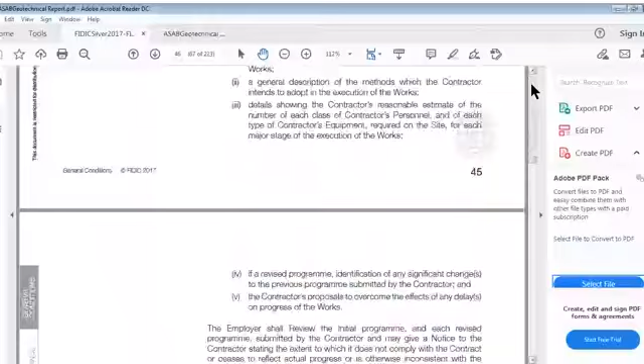Before that, I should move fast. I showed you something like commencement, delays and suspension, yes, I was there in that one. So now I'll talk, folks.

This is certain tests that we are doing, that's here. Now what this actually says, I discussed with you all this, this context of contents, there are just 20 contents, 20 sections, and actually 21.

Once last one's arbitration, so section number 1, that's clause number 1. Introduction, then 2 is project description, 3 is site description, 4 is prevailing conditions, and 5 is general geology of area. All this is shown, and this is about this reporting.

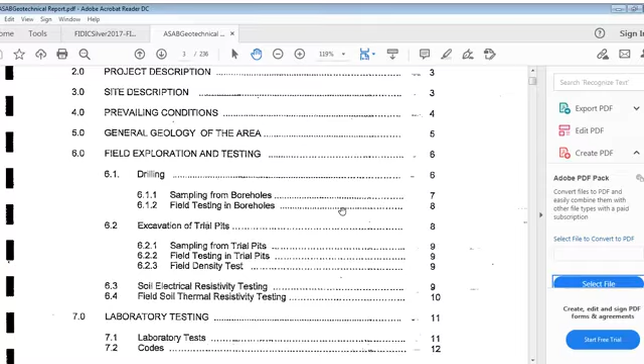General geology of area, field exploring and testing, and all that. Then laboratory testing, surface and subsurface conditions, and then this is about soil report and general discussions for choice of suitable foundations, and conclusions and recommendations.

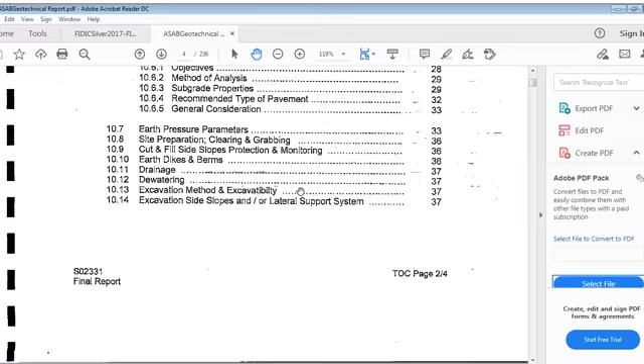And then another one has 21 clauses, that is for FIDIC. This is technical reports from a laboratory. So both are, one is technical and one is contract, so don't confuse. And the other one, I'll start with this.

All these are there, all these are shown to you, these reports, and there are certain attachments also which are very interesting, with location. We are discussing the location of boreholes and trial pits, then logs of boring and trial pits we discussed, and field test results, etc. We did not discuss completely.

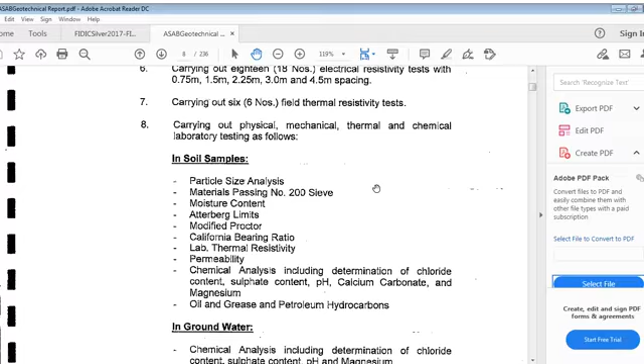So I'm not considering which company, I'm considering technical requirements. That's soil samples, test of particle size analysis, materials passing through No. 200 sieve, moisture content, Atterberg limits, modified Proctor, California bearing ratio, lab thermal resistivity, permeability, chemical analysis, including determination of chloride content, sulfate content, pH, calcium carbonate, and magnesium, oil and grease and petroleum hydrocarbons.

Then in groundwater, chemical analysis, including determination of chloride contents, sulfate contents, pH. I think there's nothing as such.

How is happening here? Camera come here. What's the camera? Why it's not taking? I don't know, what's that? How is happening, there's no camera. None of the cameras on documents, I think. This document, how can you depend on camera on this?

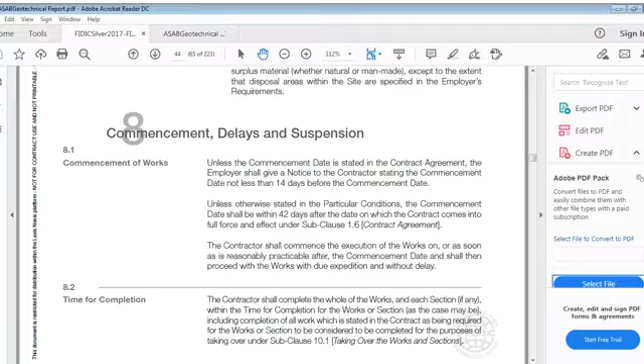See, is it? Yes, it's groundwater now, saying groundwater. So groundwater is not checked down. Groundwater is, it's not groundwater, it's, yeah, it's groundwater.

Chemical analysis including determination of chloride contents, sulfate contents, pH and magnesium, oil and grease and petroleum hydrocarbons, performing engineering analysis of field and laboratory findings, developing conclusions and recommendations for design and reporting.

So it's sharing, well, why are people sending this here? I'm fed up with these people. I should talk to them. I should talk on this. It's really a very, very serious issue, but people are not serious, they're not serious, they don't allow to work. Unfortunately, I don't like it.

So chemical analysis including determination of chloride content, sulfate content, pH, magnesium, oil and grease and petroleum hydrocarbons, performing engineering analysis and field and laboratory findings, developing conclusions and recommendations for design and construction and reporting.

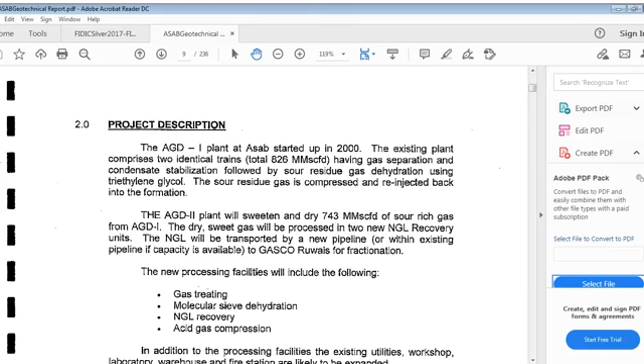Then you can say project description is there, and if you see that one, you will find the project description. So it's coming here, and this is what I can say. Project description means site description is there about this.

We go further. Prevailing weather conditions. These conditions are because it's happening in the Gulf, just briefly I'll tell you. The site is situated in Abu Dhabi, where hot and dry climate prevails. Hot and dry climate is one where evaporation exceeds the precipitation, such as rain and dewfall.

This climate regime produces characteristic hot desert terrains. Average annual rainfall may only be a few centimeters, even only a few millimeters in some parts, which usually occurs seasonally and sometimes only from a single cloud burst. Summer shade temperatures are frequently in excess of 40 degrees Celsius, and humidity may be around 100%.

Near the coast, a contrast between maximum night and day temperature and between night and day humidities is often great. Strong persistent winds are normal in many areas.

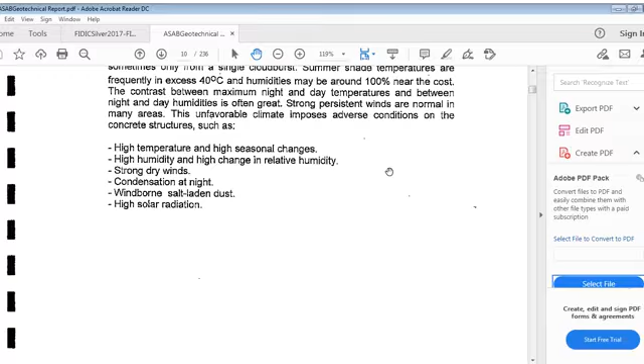This unfavorable climate imposes adverse conditions on concrete structures, such as high temperature and high seasonal changes, high humidity and high changes in relative humidity, strong dry winds, condensation at night, windborne salt-laden dust, and high solar radiation.

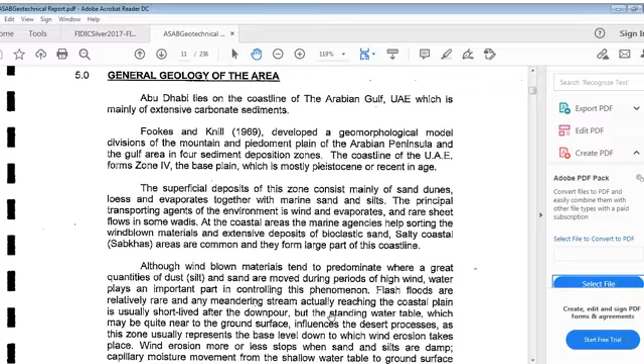Then general geology of the area, that's another point. Abu Dhabi is on the coastline of the Arabian Gulf, and they developed a geomorphological model division of the mountain long back, so we do not go further.

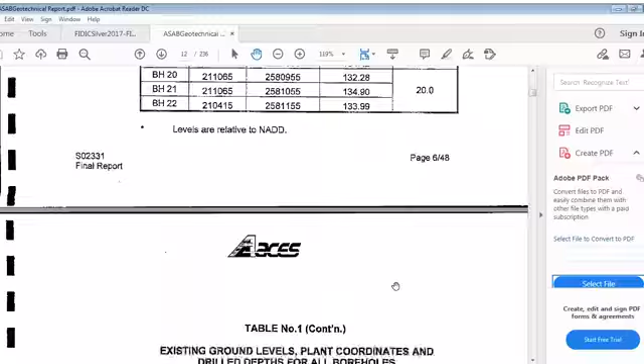And we talked of the existing ground levels. We discussed all that field data, all these tables. I discussed about borehole logs, and also there's laboratory tests that we use in order to determine physical, mechanical, thermal and chemical properties of ground material.

Laboratory tests were performed on selected samples from boreholes, trial pits and from existing surfaces. Laboratory test results are presented now. Which are those? Moisture content according to whatever it is, grain size analysis minus number 200.

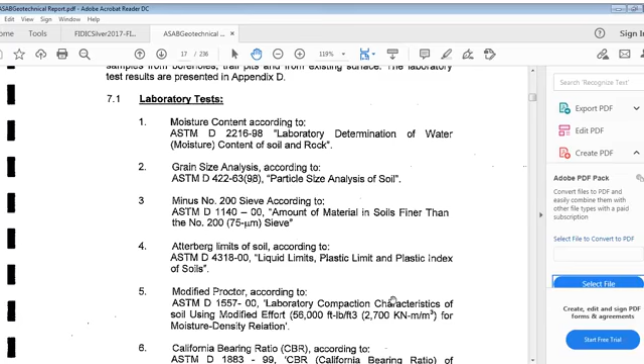Sieve analysis too, and then atterberg limits of soil, and then modified proctor according to this one, and the California bearing ratio, CBR, and lab permeability according to that. Soil thermal resistivity, water soluble sulfate content of soil and sulfate content of soil, and water soluble chloride content of soil.

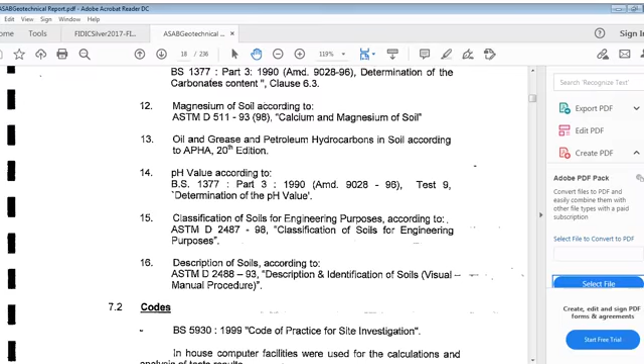And calcium carbonate content of soil, and magnesium of soil, according to the oil and grease and petroleum hydrocarbons, pH value according to the classification of soils.

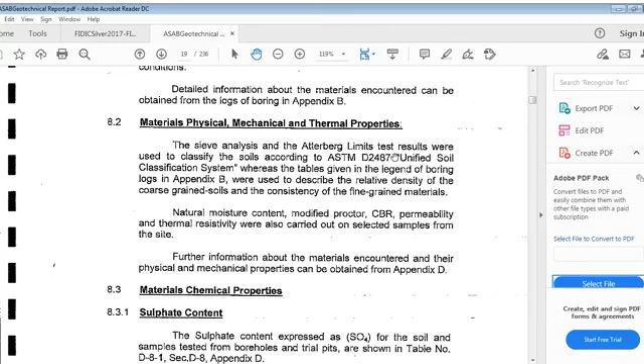For engineering purposes, description of soils according to this and the codes, and then we have to look at material physical, mechanical, and thermal properties. You can say sieve analysis and atterberg limits. Those results were used to classify soils in the unified soil classification system. So material chemical properties: sulfate content, chloride content, and others, and pH.

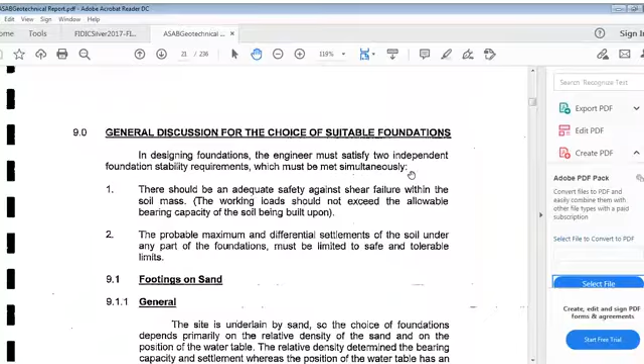Like that, we move to general discussion for choice of suitable foundations. We did that. Then we moved further down to conclusions and recommendations, foundation type, we did that. Then tank foundation hydrostatic testing, we did that also. And then allowable bearing capacity for shallow foundations, that we did now.

Then we had also gone to this allowable bearing pressure at different depths, and this we had gone through clearly. I think we had gone through all this. I think we have gone through, I'm not sure, but we will discuss that. All this, we just have a review look so that you can read that, it's better.

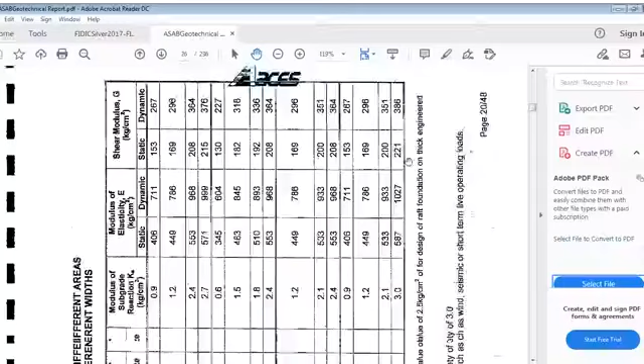That's a review of this. No, it's wrong.

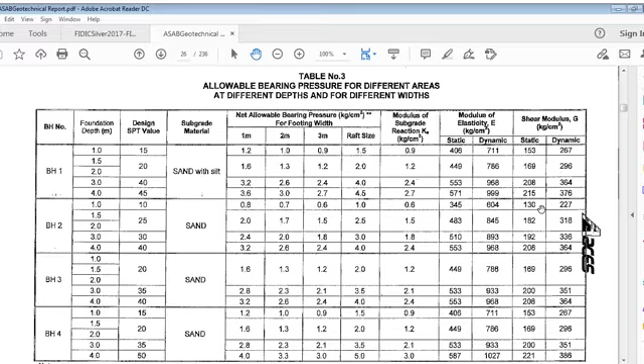So this is allowable bearing pressure for different areas at different depths and different widths. We had discussed about this, all boreholes, and we discussed about foundation depth in various during bore logging, and design SPT values are different.

Then subgrade modulus, which is that, and net allowable bearing capacity at 1 meter, 2 meter, 3 meter, 4 meters for different areas, meaning net allowable pressure for footing. We studied modulus of subgrade reaction, and then also modulus of elasticity and shear modulus.

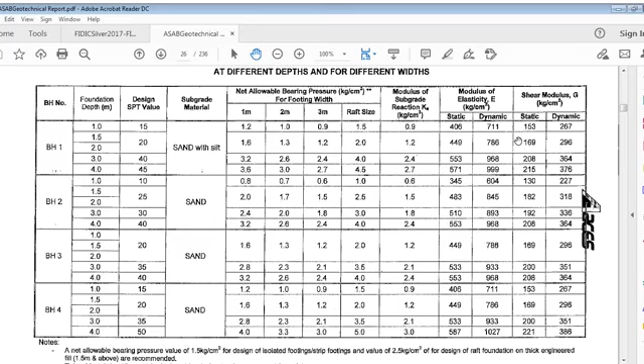We had seen that the static and dynamic values are different, about 75% difference is there. I think 75.7 percent. And this shear modulus we saw difference for all this, and we just understood that well in all these cases.

And the same notes are there, no different noting is here. And the noting says a net allowable bearing pressure value of 1.5 kilogram per centimeter square for design of isolated footings, strip footings, and a value of 2.5 kilogram per centimeter square for design of raft foundation on thick engineered fill are recommended. So thick engineered fill is recommended, that's the important one.

And then let us say, I'm sorry, let me pull off this battery also for half an hour, so that the battery can rest for some time. What's happening?

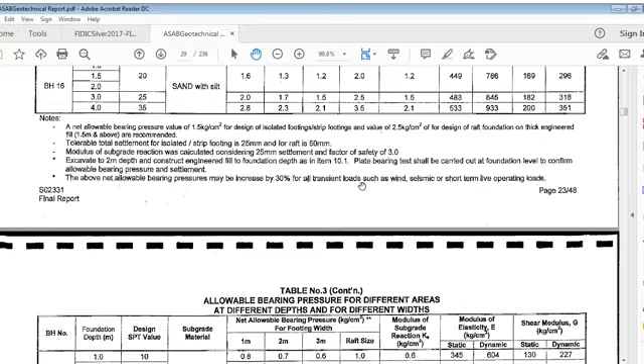Tolerable settlement for isolated strip footing is 25 mm and for raft is 50 mm. Modulus of subgrade reaction was calculated considering 25 mm settlement and a factor of safety of 3.

Excavate to 2 meter depth and construct engineered fill to foundation depth as item number 10.1. Plate bearing test shall be carried out at foundation level to confirm allowable bearing pressure and settlement, and these net allowable bearing pressures may be increased by 30% for all

transient loads such as wind, seismic, or short-lived, short-term operating loads. This is transient load, not persistent load.

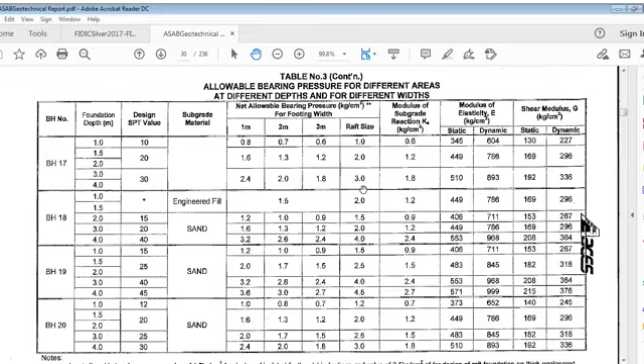We discussed all these separate boreholes one by one, and evaluated them according to our own understanding. I think these are all 28 boreholes we discussed, and now we move on.

I'll move again, rotate this. I rotate this as well. Again, I forget how to rotate this. Clockwise it is, I use clockwise here again.

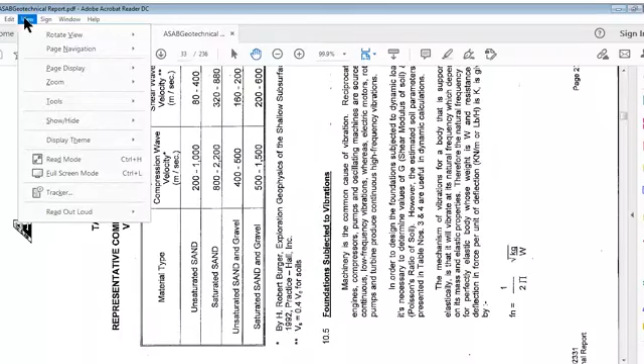Yes, this is the representative compression wave and shear wave velocities. This is very important from our point of view, because we have to understand this shear wave velocity and compression wave. What does it say?

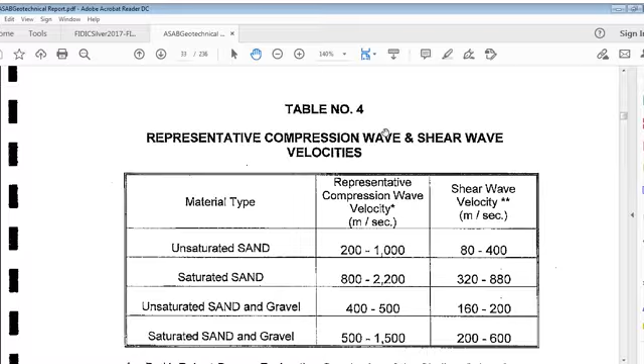It says material type, and we discussed this also: unsaturated sand, saturated sand, unsaturated sand and gravel, and saturated sand and gravel. The representative compression wave velocity is in meters per second, and shear wave velocity is also in meters per second.

Let's take some water there.

In unsaturated sand, representative compression wave velocity is 200 to 1000 meters per second. Shear wave is 80 to 400, so 40% of that. In saturated sand, representative compression wave is 4 times the original, that's 800, and 2.2 times the maximum one.

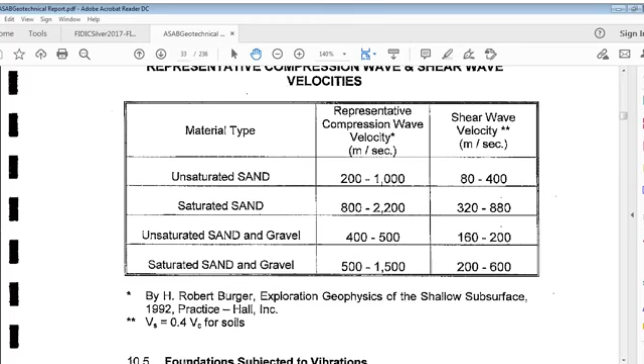Same applies to the lower one. For saturated sand it's 500, less than that. Here unsaturated sand is more, but saturated sand and gravel is 500, less than the previous case.

Now this is based on Vs. It says Vs equals 0.4 Vc, where Vs is shear velocity, which is 0.4 times Vc for soils.

So now, foundations subject to vibrations. It's very important now. Vibrations, foundations subject to vibrations. That's really interesting. Every foundation is subject to vibration.

Reciprocating engines, compressors, pumps, and oscillating machines are sources of continuous low frequency vibrations, whereas electric motors, rotary pumps, and turbines produce continuous high frequency vibrations. So in reciprocating machines, high frequency is less, but in circular or centrifugal machines, it is high.

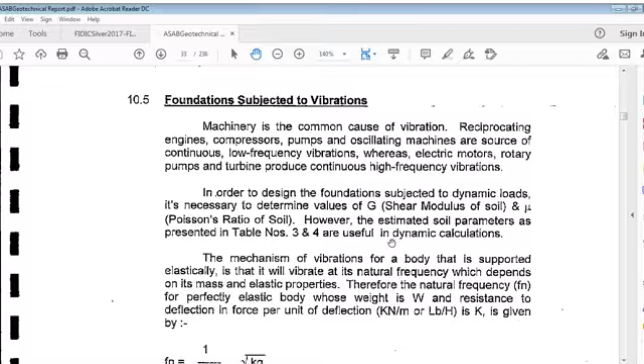In order to design foundations subject to dynamic loads, it's necessary to determine the value of G, the shear modulus of soil, and mu, the Poisson's ratio of soil. These estimated soil parameters are useful in dynamic calculations.

The mechanism of vibration for a body supported elastically is that it will vibrate at its natural frequency, which depends on its mass and elastic properties. Therefore, the natural frequency for a perfectly elastic body whose weight is W and resistance to deflection in force per unit of deflection is K.

Resistance to deflection in force per unit of deflection is K. Mechanism of vibration of a body that is supported elastically: it vibrates at natural frequency, which depends on its mass and elastic properties. Therefore, natural frequency Fn for a perfectly elastic body whose weight is W, and resistance to deflection in force per unit of deflection is K, is given by Fn equal to 1 over 2 pi under root of Kg over W.

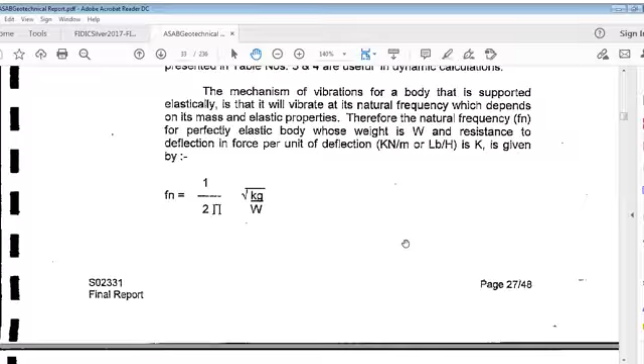General considerations in designing dynamic bases. This is very, very important. For analysis of foundation blocks subject to vibrations, the following should be considered in design. Foundation blocks means massive blocks, not concrete blocks. Be careful.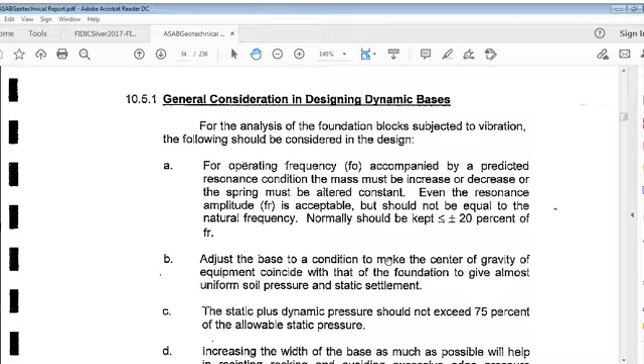Adjust the base to make the center of gravity of the equipment coincide with that of the foundation, to give almost uniform soil pressure and static settlement. Static plus dynamic pressure should not exceed 75% of allowable static pressure. Increasing the width of the base as much as possible shall help in resisting rocking and avoiding excessive edge pressure problems.

Try to provide 300 mm clearance all around the machinery frame to help in maintenance and other requirements. It is seldom necessary to use high strength concrete for vibrating bases, since mass is usually more critical than strength.

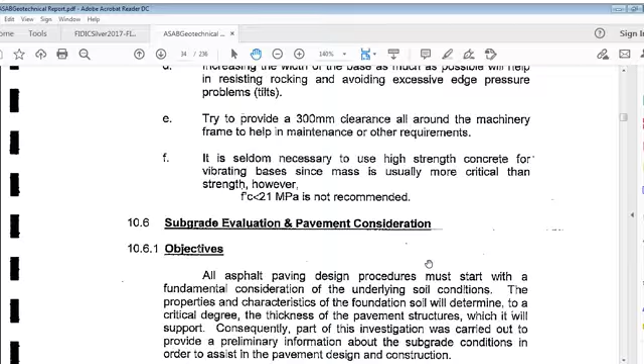F-C less than 21 MPa is not recommended, so let us say more than 21. Why 21 only? Subgrade evaluation and pavement consideration - subgrade, now this is for roads we are talking about.

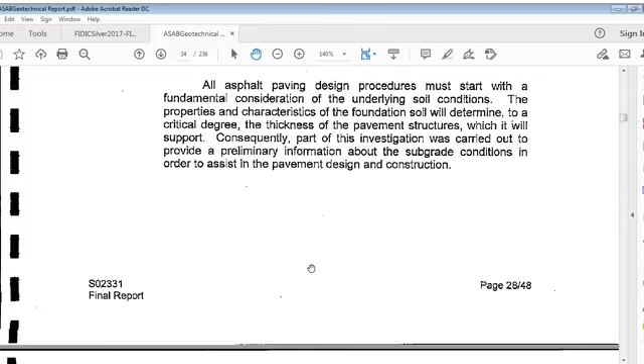Subgrade evaluation objective: all asphalt paving design procedures must start with fundamental consideration of the underlying soil conditions. Properties and characteristics of the foundation soil will determine to a critical degree the thickness of pavement structures which it will support. Consequently, part of this investigation was carried out to provide preliminary information about subgrade condition in order to assist in pavement design and construction.

Method of analysis: origin, composition and properties of subgrade soils in the area of trial pits were determined. Soil classification and identification is based on ASTM 2487, classification of soil for engineering purposes, unified soil classification system, and AASHTO M145-91 classification for soil.

Classification of soil for engineering purposes, unified soil classification system, and AASHTO M145-91 classification of soils and soil-aggregate mixtures for highway construction purposes - so there are two purposes. It should be recognized that current methods for evaluating soils and aggregates are generally considered to be of an empirical nature. Engineering judgment therefore must be used in applying the results of these tests.

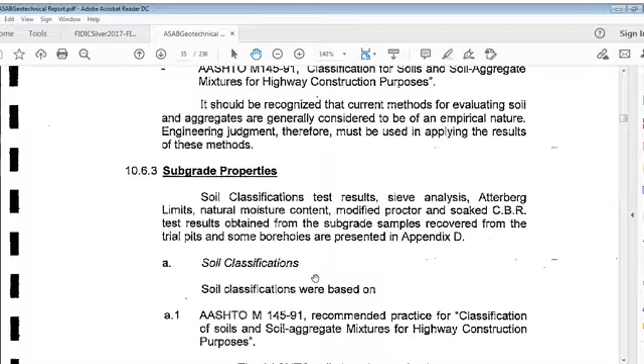Subgrade properties: soil classification test results, sieve analysis, atterberg limits, natural moisture content, modified Proctor and soaked CBR test results obtained from subgrade samples recovered from trial pits and some boreholes.

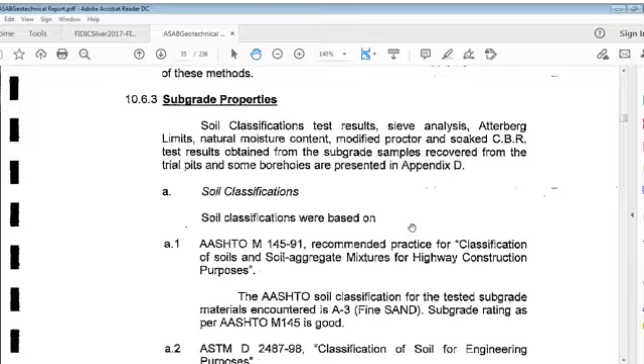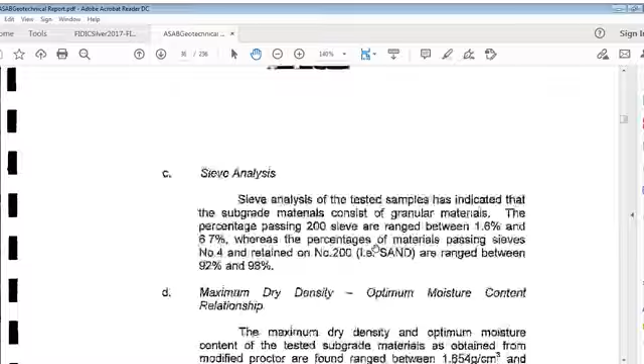Sieve analysis of tested samples indicated that subgrade material consists of granular materials. Percentage passing sieve number 200 ranged between 1.6 and 6.7%, whereas percentage of materials passing sieve number 4 and retained on number 200 are in range.

Sieve analysis of tested samples has indicated that subgrade material consists of granular materials. Percentage passing sieve 200 ranged from 1.6 to 6.7%, whereas percentage of materials passing sieve number 4 and retained on number 200 ranged between 92 and 98%.

Maximum dry density versus optimum moisture content relationship: maximum dry density and optimum moisture content of tested subgrade material, as obtained from the modified Proctor test, are found.

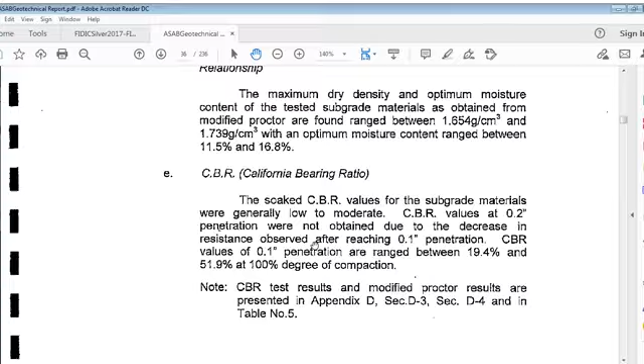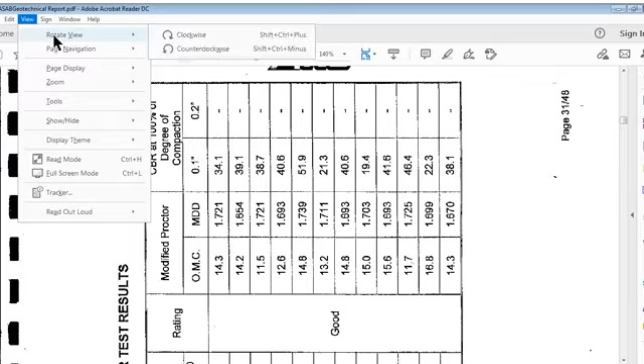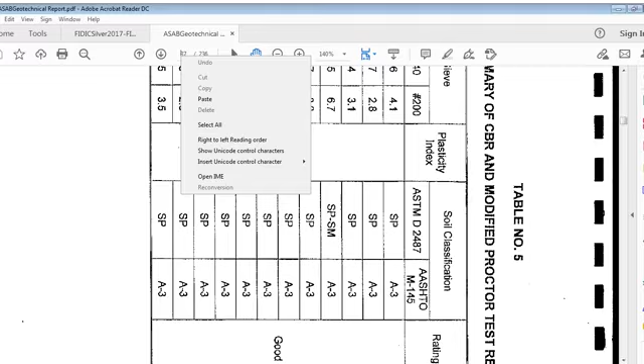Let us compare this directly. This is the table. What is this? Not this one, that was that one. Which file is open? I don't know which file is open actually. Why is this open here? Why is this user system like this? That is very heavy stuff.

The summary of CBR and modified Proctor test results. This is also part of the slope study, and that is also very important. You can see that...

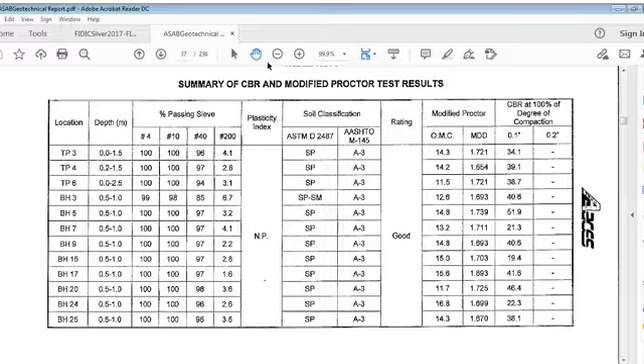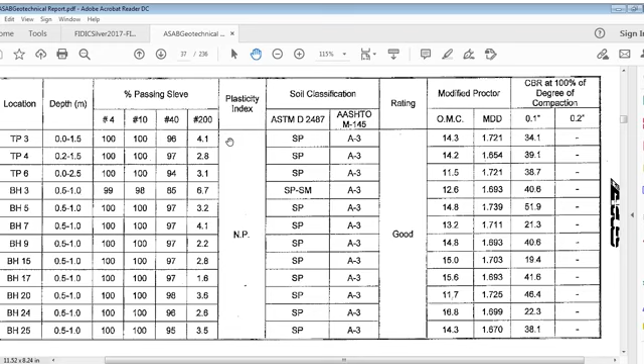So this is a table that shows the CBR results: summary of CBR and modified Proctor test results, including location, depth, sieve number, passing sieve, and plasticity index, soil classification for both ASTM and AASHTO, rating, modified Proctor OMC and MDD, and CBR at 100% degree of compaction.

This is for all test pits and bore holes. These are about how many tests? 1, 2, 3, 4, 5, 6, 7, 8, 9, 10, 11, 12. So it's based on CBR.

Now TP3, depth is 0 to 1.5. It shows passing sieve number 4, number 10, number 40, and number 200. Sieve number 4 passes 100%, number 10 is 100%, number 40 is 96%, so 4% is retained, and number 200 is 4.1%.

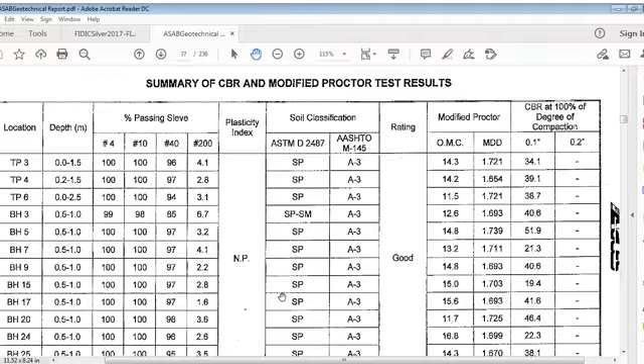We are getting degree of compaction and optimum moisture content, say 14.3 gives CBR 34.1. When optimum moisture content is slightly different, it increases slightly, then goes down further to 11.5. So when moisture content is 11.5 versus 14.3 to 14.7, CBR was 34.1 — but there's no clear relation.

It was 14.2 is 39.1, so it doesn't relate. So let's say,

Now come to BH3 borehole. If you see boreholes, this is 0.5 to 1 meter depth. This is number 4, 99, number 10, 98, and number 40, 85. 6.7 here, non-plastic, and this is A3, so 12.6 OMC, and MDD is 1.69, 40.6 is more.

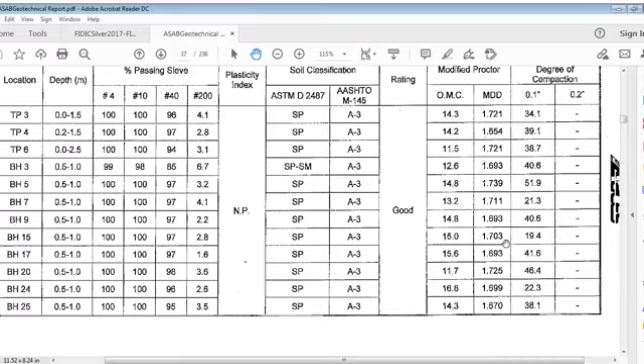So what we get here is the class of plasticity index, which is generally non-plastic, and rating is good, and moisture content and degree of compaction. We can understand its independent records of these for all boreholes.

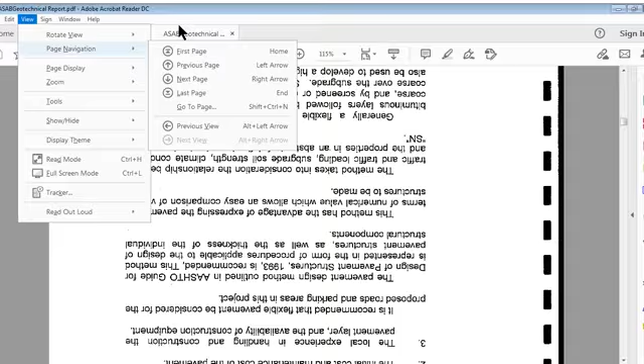Now recommendation type of pavement, let us see what recommendation pavement is. What is that? Previous page is one. No.

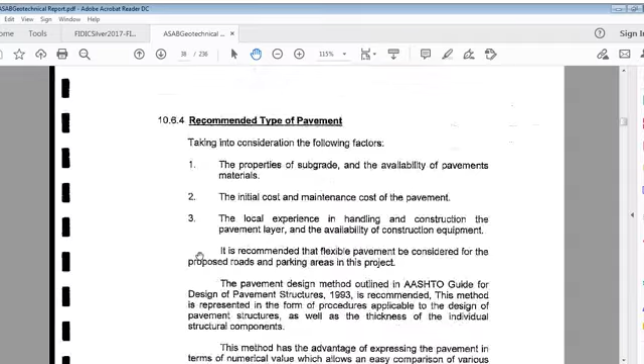Types of pavements. Taking into consideration following factors: properties of subgrade and availability of pavement material, initial cost and maintenance cost of pavement, local experience in handling and construction, pavement layer and availability of construction equipment.

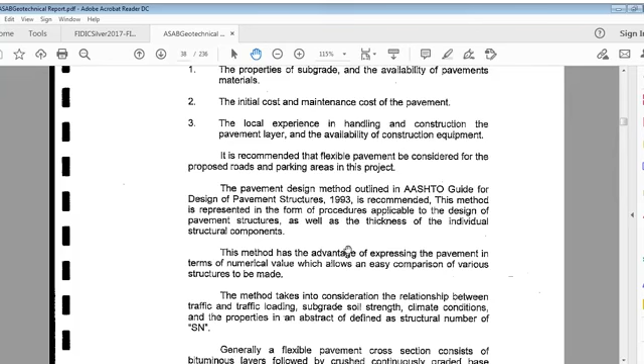Recommended that flexible pavement be considered for proposed roads and parking areas in this project. Pavement design method outlined in the guide for design of pavement structure, 1993, is recommended.

You can say then now it's that pavement design method outlined. So this method is represented in form of procedure applicable to design of pavement structures, as well as thickness of individual structure components.

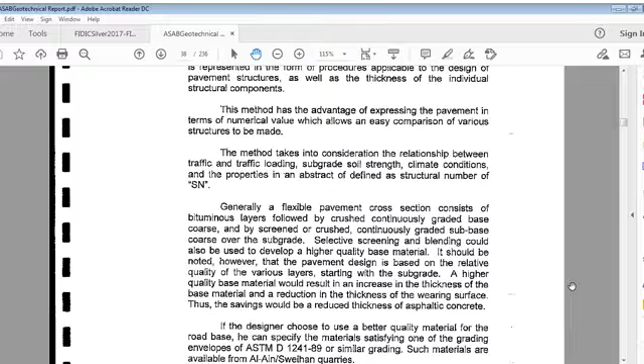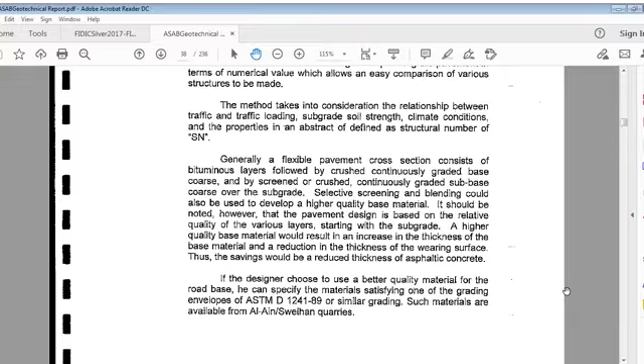Method takes into consideration relationship between traffic and traffic loading, subgrade soil strength, climatic conditions, and properties, defined as structural number, SN. Generally,

Now, generally a flexible pavement cross section consists of...

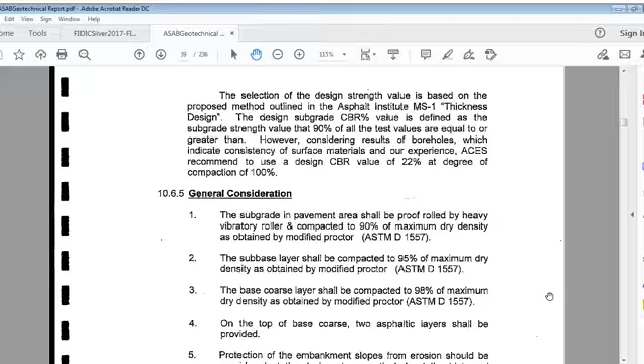The recommended use of design CBR value of 22%. General considerations. General considerations.

Subgrade in pavement area shall be proof rolled by heavy vibratory roller and compacted to 90% maximum dry density, as obtained by Proctor, modified Proctor. Subbase layer shall be compacted to 95%, and that is maximum dry density as obtained by... base course layer shall be compacted to 98% of maximum dry density.

Then you can say base course layer shall be compacted to 98% of maximum dry density as obtained by modified Proctor, ASTM D 1557.

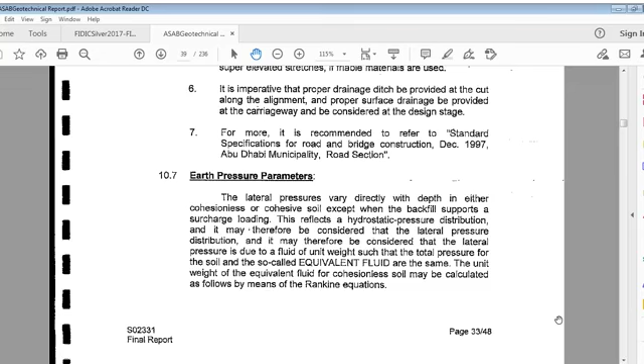Lateral pressure varies directly with depth in either cohesionless or cohesive soils, except when backfill supports a surcharge loading. This reflects a hydrostatic pressure distribution, and it may therefore be considered that lateral pressure is due to a fluid of unit weight.

Lateral pressure varies directly with depth of either cohesionless or cohesive soil, except when backfill supports a surcharge load. This reflects the hydrostatic pressure distribution, and it may therefore be considered that lateral pressure is due to a fluid of unit weight, such that the total pressure of soil and the so-called equivalent fluid have the same unit weight. For cohesionless soil, this may be calculated by means of the Rankine equation.

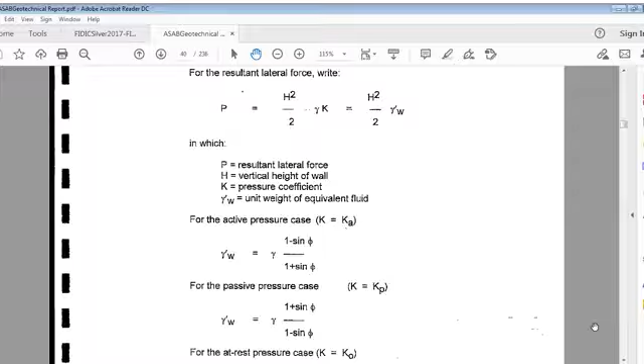P is equal to the resultant lateral force, H is equal to the vertical height of the wall, K is equal to the pressure coefficient, and gamma W is equal to the unit weight of the equivalent fluid. For the active pressure case, K is equal to Ka, and gamma W is gamma times 1 minus sine phi over 1 plus sine phi. For the passive case, K is equal to Kp.

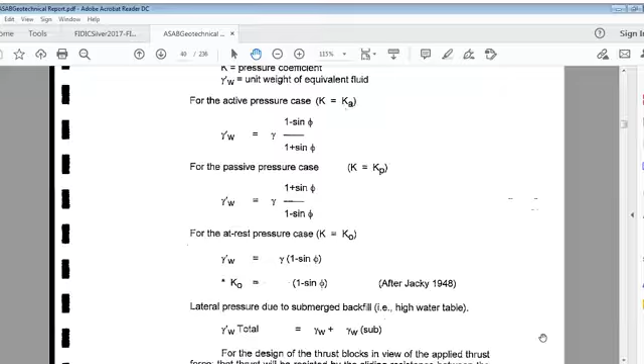At the at-rest pressure case, K is equal to Ko, and gamma is equal to gamma into 1 minus sine phi. Ko is equal to 1 minus sine phi.

Then lateral pressure due to submerged backfill, that is with a high water table: gamma dash total is equal to gamma plus gamma sub, where gamma dash W is equal to gamma W plus gamma sub.

For design of thrust blocks in view of applied thrust forces, the thrust will be resisted by sliding resistance between the base and the soil, and by lateral passive pressure. Therefore, thrust resistance is equal to the sum of these resisting forces.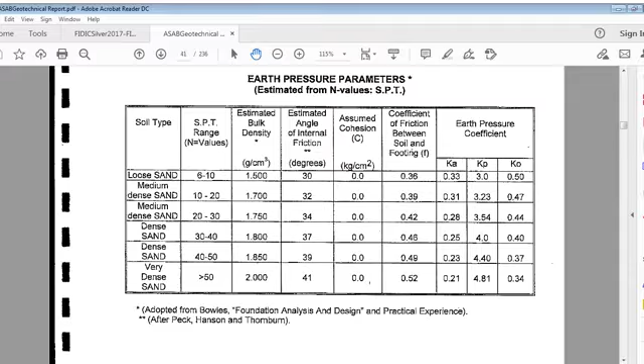Site preparation: in general, prior to commencing grading and backfilling operations, stripping of the surface of natural material shall be required to remove loose debris, visible surface vegetation, roots, concrete and asphalt layers, waste, and other soft, weak, or otherwise unsuitable soils from the ground surface. Exposed subgrade after excavation shall be scarified to a minimum depth of 30 centimeters.

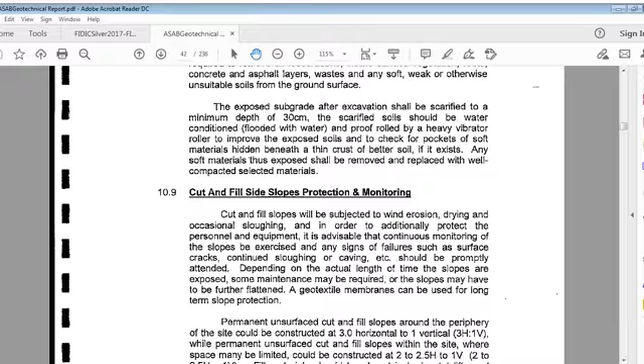Any soft materials thus exposed shall be removed and replaced with well compacted selected materials. Cut and fill side slopes protection and monitoring is also very important from that viewpoint.

Why don't these people listen? What do I do, these people, I don't understand why they send messages saying they will listen. Yuvraj Singh is sending, Anuradha Kumar is sending, Roman is sending - they know I am on video, they are just telling me what to do. I am really surprised at these people, okay.

So what's this? Let me move through one or two pages of this and then I'll go to contract a little, because this is already spanning long - it's already 7:45 here.

Cut and fill side slopes protection and monitoring. Cut and fill slopes shall be subject to wind erosion, drying, and occasional sloughing, and in order to additionally protect personnel and equipment, it's advisable that continuous monitoring of slopes be exercised. Signs of failure, such as surface cracks, continued sloughing or caving, etc., should be promptly attended to depending on the actual length of time.

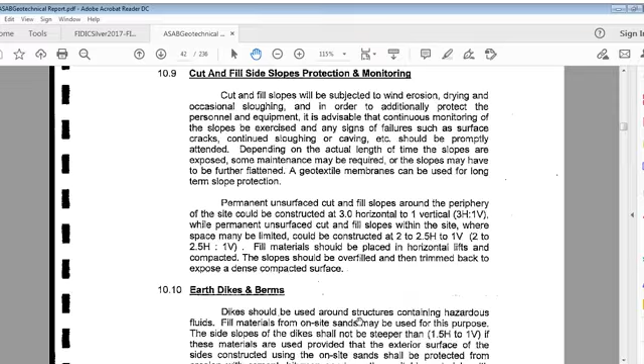A geotextile membrane can be used for long-term slope protection. Permanent unsurfaced cut and fill slopes around the periphery of the site could be constructed at 3 horizontal to 1 vertical (3h/1v), while permanently unsurfaced cut and fill slopes within the site, where space may be limited, could be constructed at 2 to 2.5h to 1v. Fill materials should be placed in horizontal lifts.

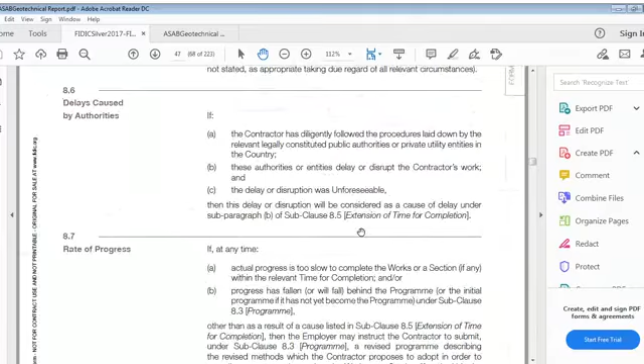Then earth dikes and berms. We'll take this up later on. Let's move to suspension, delays, etc. This was spoken about before - this specific point is advance warning and extension of time for completion. We discussed that one - delays caused by authorities and rate of progress, delay damages, and employer suspension.

Let's go over this again because it's very important material. So what is extension of time for completion? What's actually in the contracts - it's very important to consider this issue.

SP Seni, why are you disturbing me? Good morning to everybody, finish now. Don't disturb me, please, don't disturb me.

So why extension of time for completion, after all, while you are working? I think the contractor shall be entitled, subject to subclause 20.2, claims for payment or EOT as you call it. Extension of time, if and to the extent that completion for purposes of subclause 10.1, taking over works and sections, is or will be delayed by the following causes: a variation, except that there shall be no requirement to comply with subclause 20.2 - its limit on claims for payment or EOT.

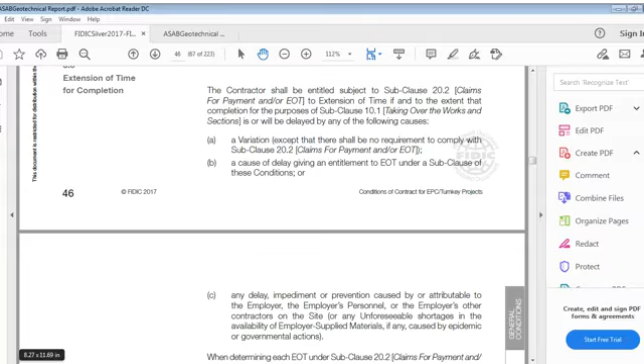It says extension of time, if and to the extent that completion for purposes of subclause 10.1, taking over work and sections, will be delayed by the following causes: a variation, except that there shall be no requirement to comply with subclause 20.2 claims for payment and/or EOT. A variation - if there's a variation, it may be considered as a cost variation, and may possibly be a cause of delay giving an entitlement to extension of time under a subclause of these conditions. Or delay, impediment, or prevention caused by or attributable to the employer, the employer's personnel, or the employer's other contractors on site.

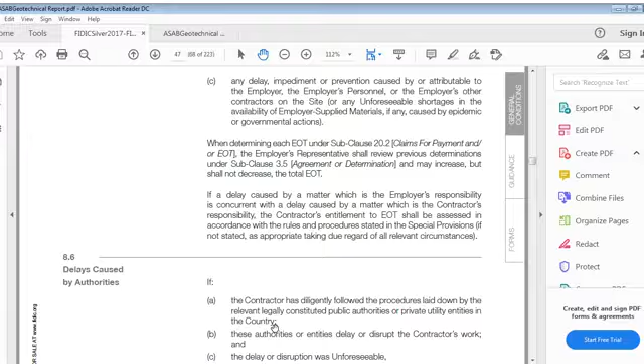So when determining each EOT under subclause 20.2 claims for payment and EOT, the employer's representative shall review previous determinations under subclause 3.5 agreement or determination, and may increase but shall not decrease the total EOT. If a delay caused by a matter which is the employer's responsibility is concurrent with a delay caused by a matter which is the contractor's responsibility, the contractor's entitlement to EOT shall be assessed in accordance with the rules and procedures stated in the special provisions; if not stated, as appropriate, taking due regard to relevant circumstances.

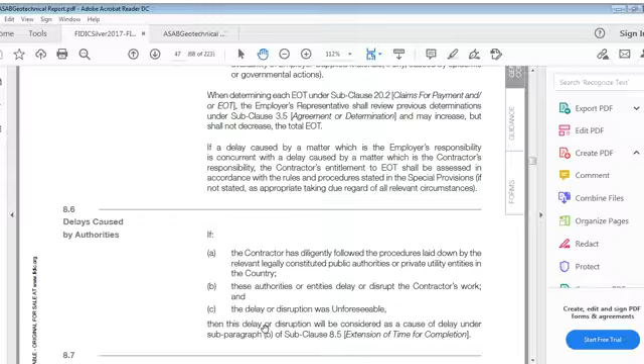Delays caused by authorities: if a contractor has diligently followed procedures laid down by relevant legally constituted public authorities or private utility entities in the country, and these authorities or entities cause delay or disruption that is unforeseeable, this delay or disruption shall be considered as a cause of delay under subparagraph B of subclause 8.5, extension of time for completion. So we can say a contractor diligently followed procedures laid down by relevant authorities.

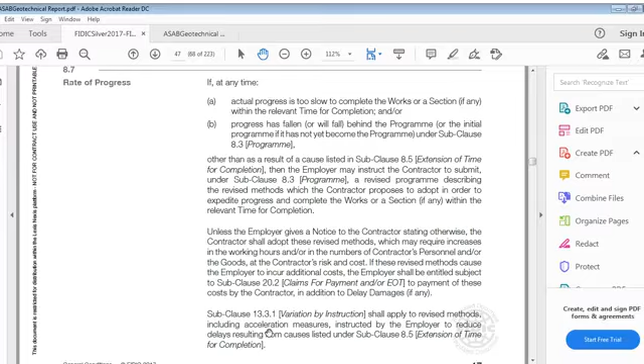If at any time actual progress is too slow to complete the works or a section within the relevant time for completion, and/or progress has fallen or is expected to fall behind the program, or the initial program which has not yet become the program under subclause 8.3 program, other than as a result of a cause listed in subclause 8.5 extension of time for completion, the employer may instruct the contractor to submit under subclause 8.3 program a revised program describing the revised methods which the contractor proposes to adopt in order to expedite progress and complete the works or a section within the relevant time for completion. That's what is required now.

In that case, we call it generally the recovery program. Unless the employer gives a notice to the contractor stating otherwise, the contractor shall adopt these revised methods, which may require increases in working hours and/or in numbers of the contractor's personnel and/or goods, at the contractor's risk and cost.

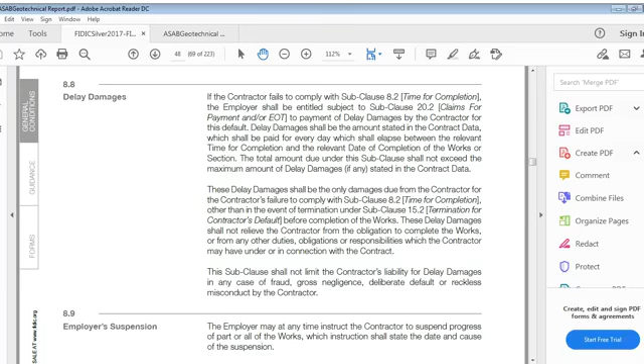These delay damages shall be the only damages due from contractor for contractor's delay, failure to comply with subclause 8.2 time for completion, other than in event of termination under subclause 15.2 termination for contractor's default before completion of works. These delay damages shall not relieve contractor from the obligation to complete works.

So this is something we actually have to understand here. I would say it's not that easy to handle such issues, but there are many practical difficulties for which we are here to confer with this.

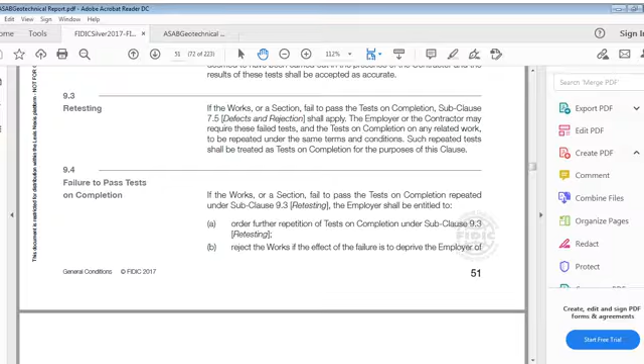Therefore, I say not only these engineers, but quality engineers also should complete records, because there may be some dispute, or some item, or some approval that is not approved, rejected, and you have a clash. So we have to be very careful in this regard. Thank you very much, gentlemen.